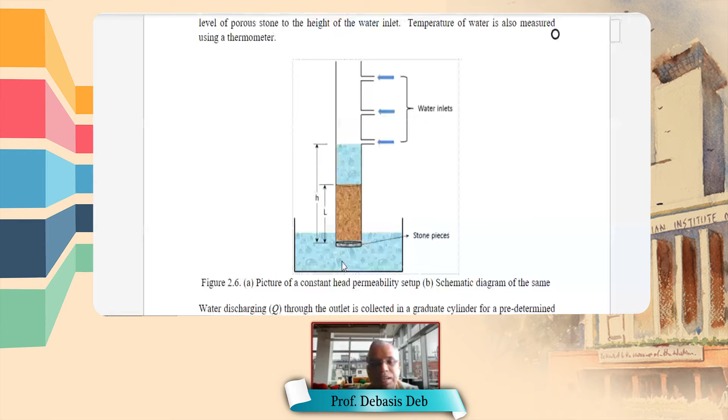So now under this pressure head, we have a length L, which is the sample length. So it's very simple, we can now write the formula, just Darcy's law. Q is the quantity for a given time, which came out, and we have measured it. K is the hydraulic conductivity, and you see it is exactly that formula. H is that water head, that means HA minus HB.

Here HB is considered to be 0 because it's atmosphere. And this is basically LB minus LA, or that is the length L.

So once we know this, why are we doing these 3 different cases? Because we vary the water head H so that the quantity will change. If H is high, Q will be high. Under that condition, we get at least 3 points like this. So we vary the head, the quantity changes. Then we draw a line, and the slope of this line is basically K.

Because you can see this is y equals mx, and this is m, and this is x. So that is what we are plotting here.

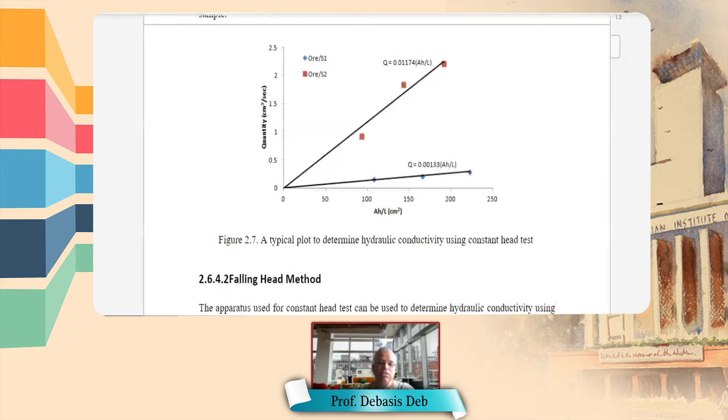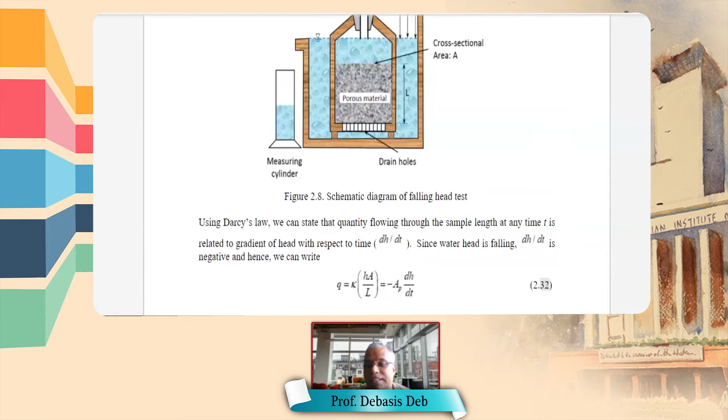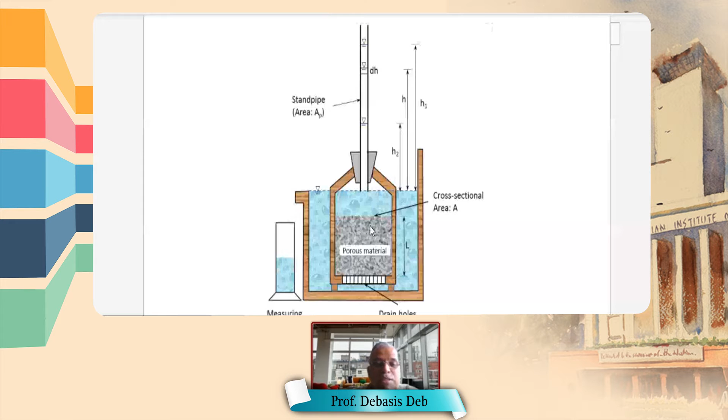Another experiment is called the falling head method. Let me first show you the diagram — this is in the book, you can see. What this is showing is the porous material will be here, in a kind of chamber, and there will be some drain holes so that the water can come out.

Here they say the name is falling head — that means we are allowing the head to change. In the previous experiment, we did not allow the head to change, so the water inlet equals the water outlet. So it's basically completely steady state flow — whatever is coming in, that is coming out.

Here what is happening, let's say there is an initial water head, and we know the cross-sectional area of this — that's called a standpipe, and let's say the cross-sectional area is AP.

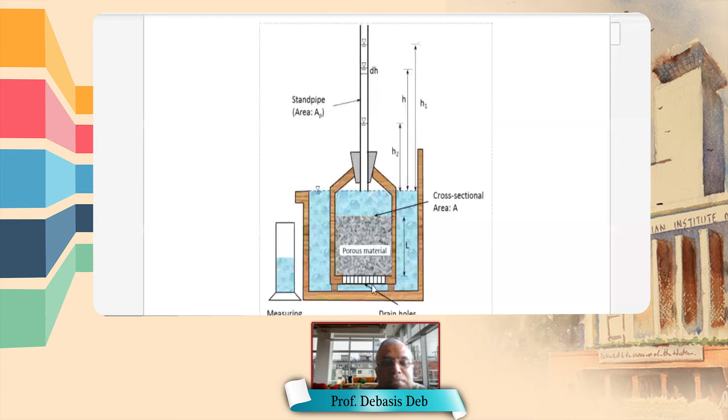Water is coming through that and will directly enter into it, then water will come out through this. So somehow this one is not working.

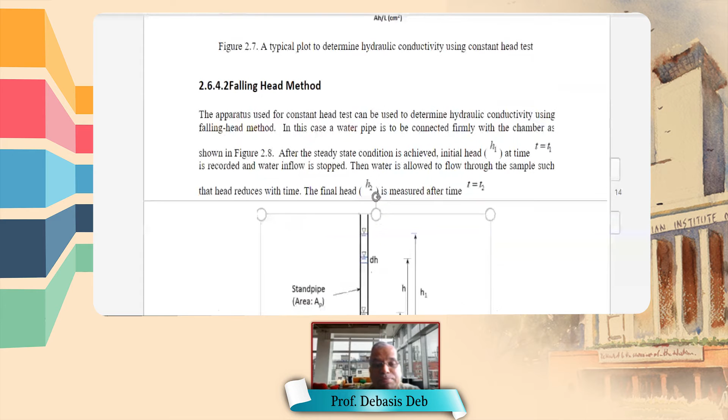Now, since the head is going to change, what is the equivalence here? Let me come down. See, the quantity must be the same, right? Whatever is falling through that standpipe, that smaller pipe, that quantity is what?

The dH by dt. Let's say for a certain time dt, it has fallen by dH. So how much has it fallen? The volume, AP into dH, is its volume, divided by dt is the rate at which it has fallen within that time, and that must equal whatever Darcy's law told us through that

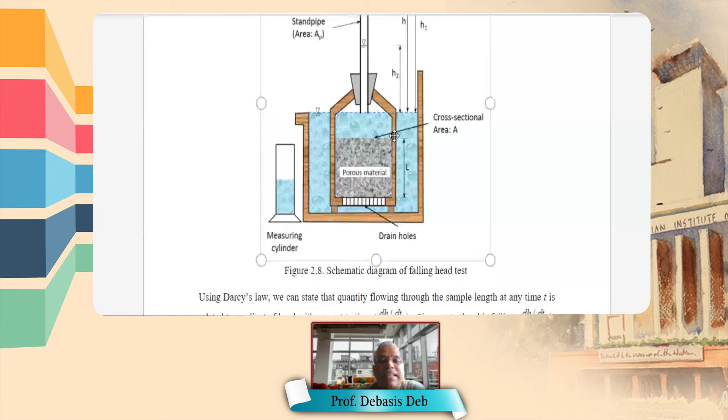cross-sectional area. So this is the A, the cross-sectional area of this sample. Then this is the L, the length of the sample. And so we know K into HA by L. This is from Darcy's law, and this is what is the falling head.

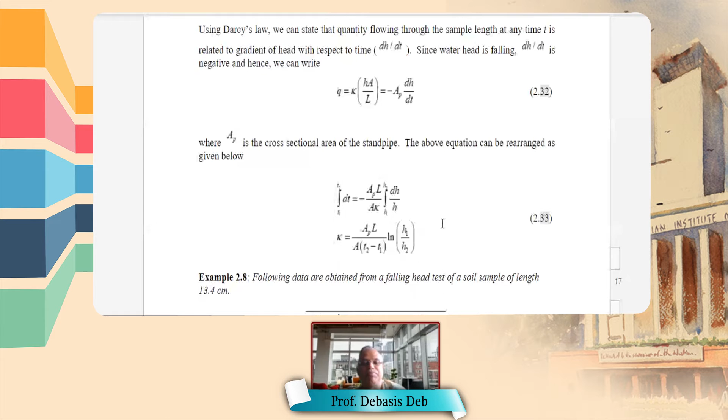So now if we integrate between time T1 to T2, you have to get two times, and you have to measure two heads, say starting head and ending head at time T2. So we get a formula like this. By integrating this, we can calculate the value K.

Now these are the two ways to calculate the hydraulic conductivity. I will encourage you to think of any other way if you can find out, this will be fantastic. Now in our lab we have the experimental setup for both of them. When you come back, you will do the experiment in both setups, and you will find out the value K of that certain soil or sand. This is what you will be asked to do. The formula and all these things I'm not writing, but you can get it from the book also.

So this is what is the two experimental setups for finding out the hydraulic conductivity. All right, now I hope you are now seeing the whiteboard. So what I told you today is two experiments. What happened here? Okay, number one is

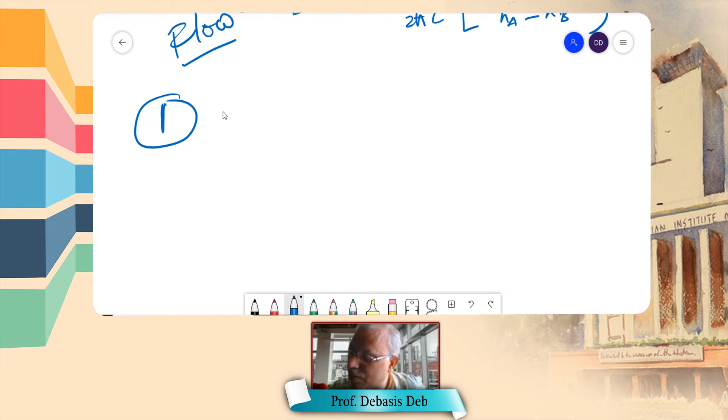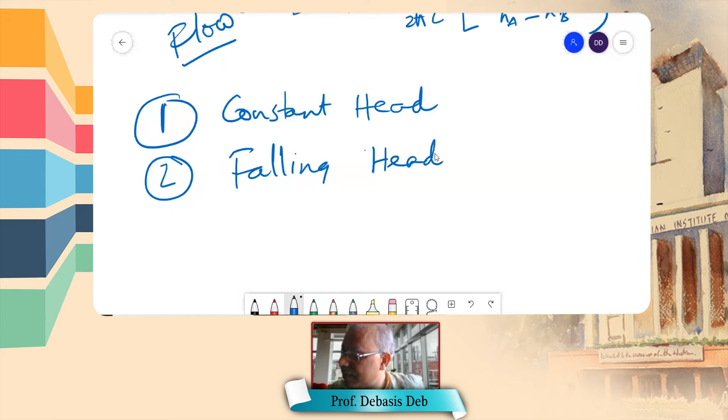constant head, and number two is falling head, for finding out hydraulic conductivity.

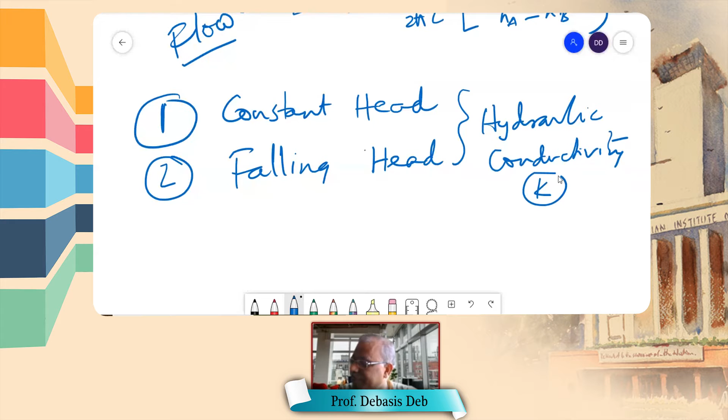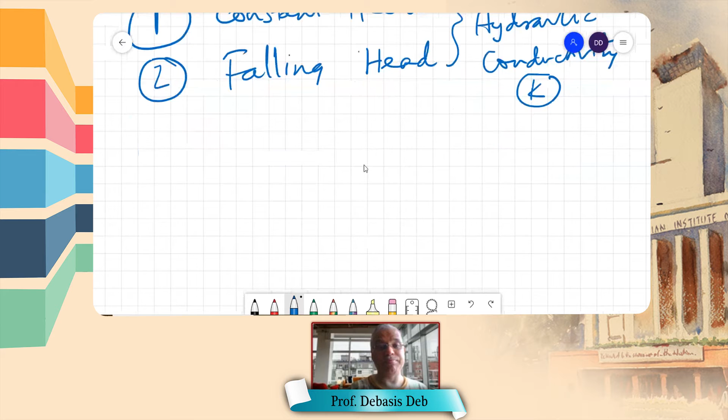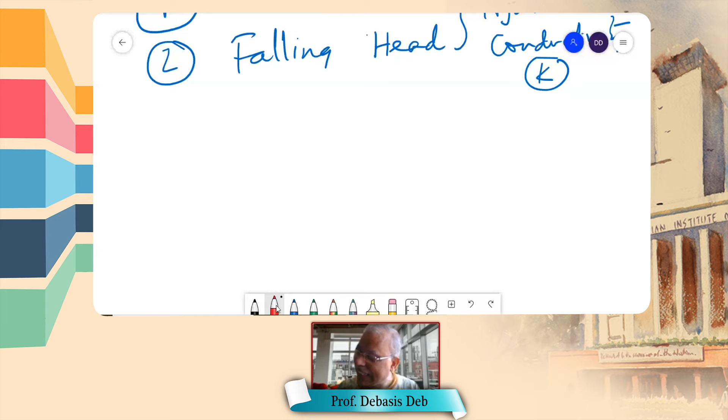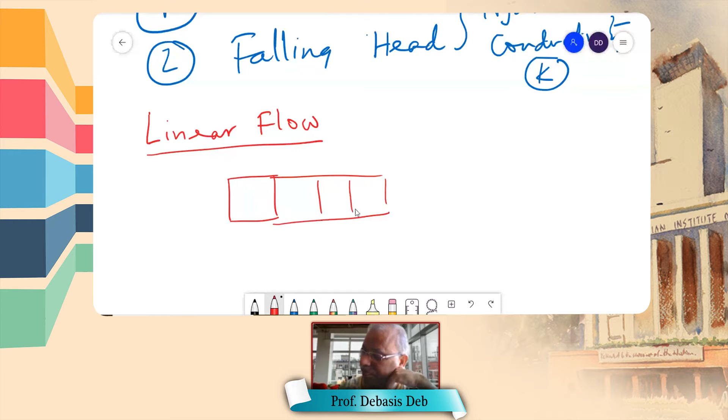Now we will go to a territory where, let me draw it first, then I will ask you to calculate. Let's say this is a linear flow happening, and flow is going from here to here. And let's say this is some HA, and this is some HB.

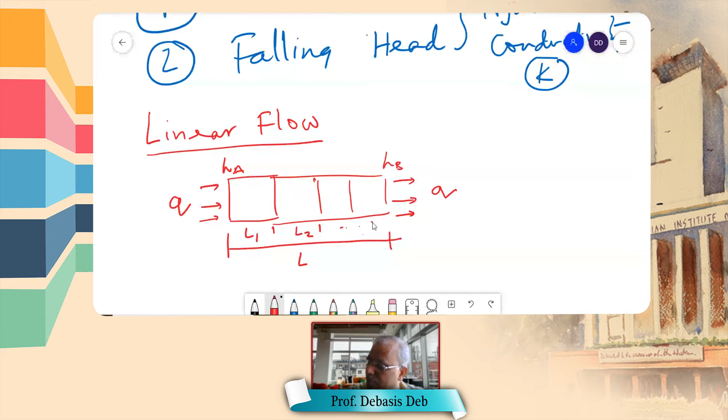This is the pressure head. The flow is Q. The total length is L, but each length is L1, L2, and so on up to Ln. And this has different rock layers, they're all different. So they have K1, K2, and all the Kn.

So these are known, K1, K2, Kn is known. Quantity Q is flowing from point A to point B, where the pressure is HA and HB. Definitely HA is greater than HB.

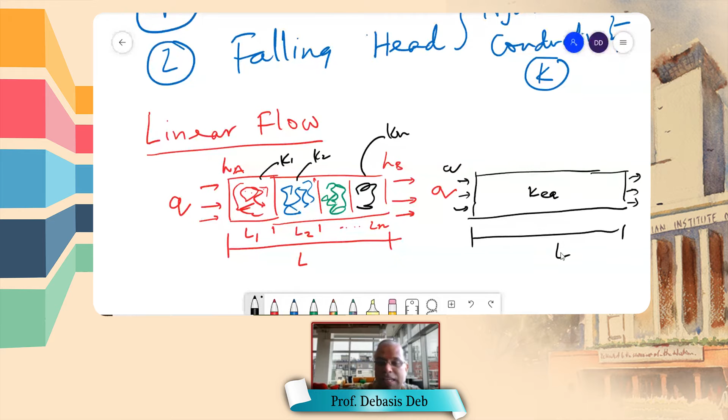Now, if I have to replace this by an equivalent material, let's say K equivalent, the same Q will come in here and the same will come out here. The length is again L. So you have to tell me, I'm giving you 2 minutes to find out, K equivalent equals what?

This is a series combination of strata. Each stratum having length Li and its hydraulic conductivity is Ki. Is that clear? So their length is Li and hydraulic conductivity Ki. They are under the pressure difference of HA minus HB for the total length L. So what will be the equivalent hydraulic conductivity

of this combination of layers? You have done the resistance equivalence when it is in series. Now it is the hydraulic conductivity equivalence. Find out the equation. I'm giving you just 2 minutes, or somebody tell me how to do it, where to start.

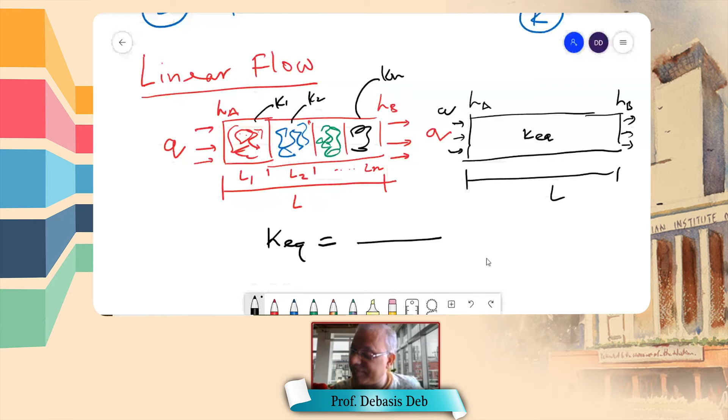So we can start using Darcy's equation for each layer. Okay, you tell me for the first layer, what will be the Darcy's equation for this layer? Q is K1, HA minus HA something, divided by...

Okay, let's write del H1, this is the pressure drop, let's say I assume from here to here. This will be equals to Q by A using Darcy's law. I am writing L1 by K1. Can I write that? Everybody see that? Yes sir, okay, I just rearranged.

So basically the pressure drop for each layer is different. So this I can put i for the ith layer, it will be like this. And A is constant here because the cross-sectional area is constant for each layer.

Now, definitely the sum of all this for all i equals 1 to n layers must be equal to the same pressure drop. If I sum all this pressure drop, this will be HA minus HB, isn't it? The total pressure drop, like you have done with the voltage difference between two points. Here is the potential, the pressure. It's exactly the same thing.

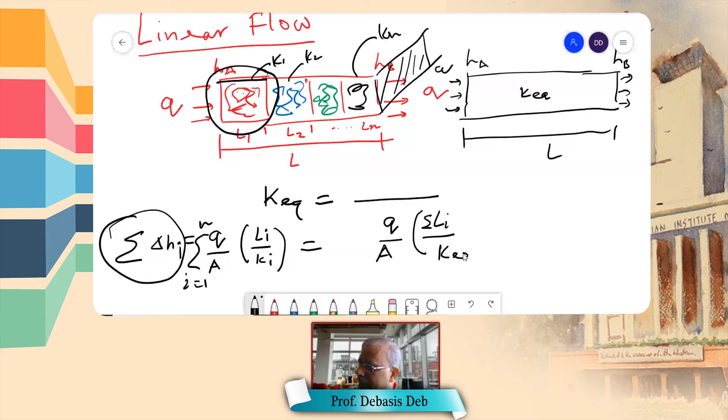And so this one will be, again, I can write Q by A, because this remains constant, equals summation of Li by K equivalent, right? So from there you can find out K equivalent, these cancel out, so I can write summation of Li by summation of Li by Ki. Okay, that is your K equivalent here. Everybody got that?

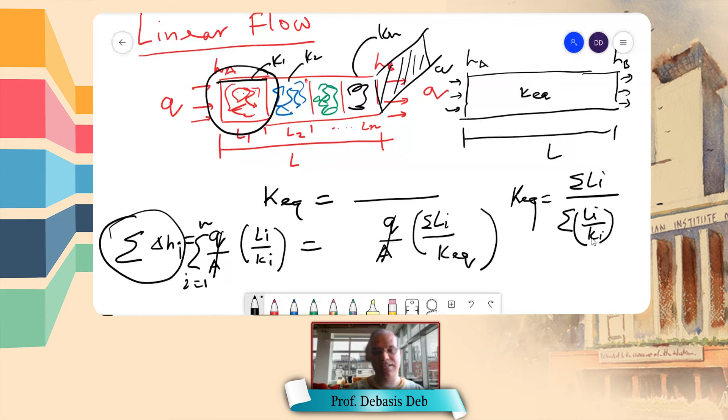Yes sir. Okay, so if the layers are in series, and the same Q is flowing through all the layers, then we can find the equivalent hydraulic conductivity. Now can you find the same for...

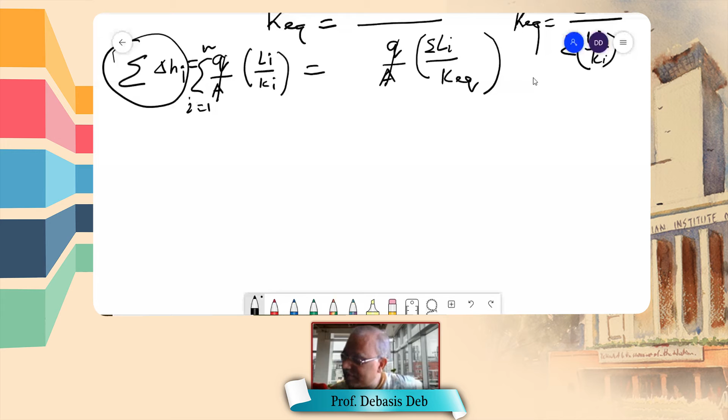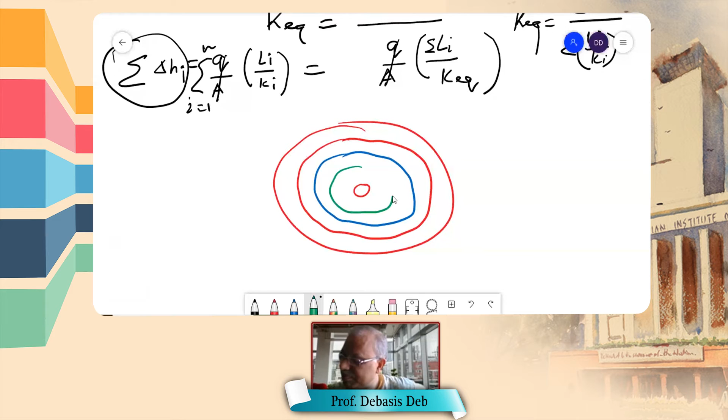radial flow? I can give you the drawing of the radial flow, and let's say this is the well. Now I have different layers, let's say this is R1 and this is Rn, and let's say this is R1. This may be Hn and this may be H1, let's say H1 or H0. I made it 0, then it is better.

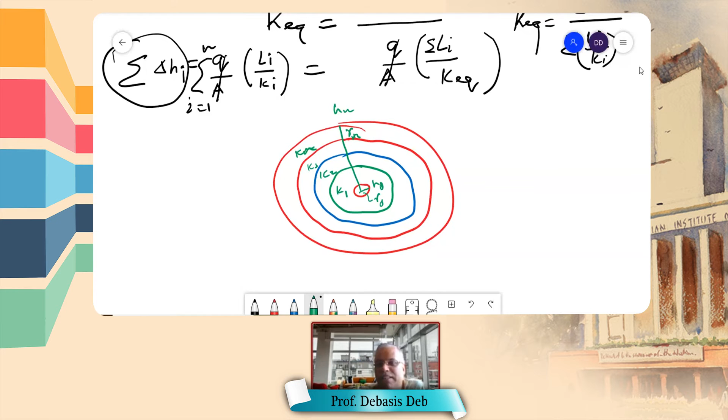Can you find that out? And all these things have different values. So this one is K1, K2, so on, K3, and up to, let's say, Kn. Here the radius is the difference. So can you find that out for radial flow? I hope you remember the equation, otherwise I can show you the equation. I think it is there.

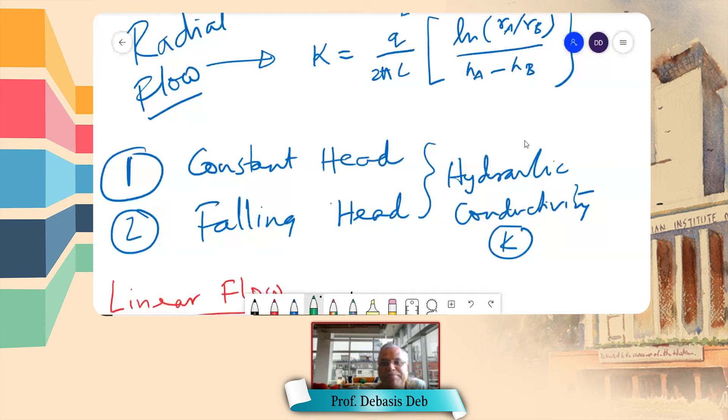This is the equation, okay. You can use this equation to build the equivalence. You write this equation, K equals Q by 2 pi L. Here L remains constant, okay, and ln Ra, which is the extreme side, by Rb, and Ha minus Hb. The approach is same, okay. The approach is exactly the same. There is no difference between the approach. Only thing, you have to use that equation.

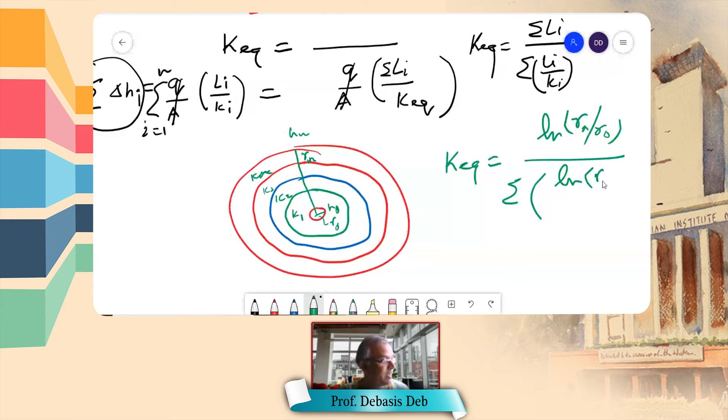And let me give you the formula so that you can try it at home. So K equivalent equals ln Rn by R naught, divided by summation of ln Ri by Ri minus 1, divided by Ki. Okay, this is what will be the formula if you derive it. Okay, exactly the same way you can derive it. Rn is the last radius, or the largest radius, where you have the maximum pressure, the maximum head.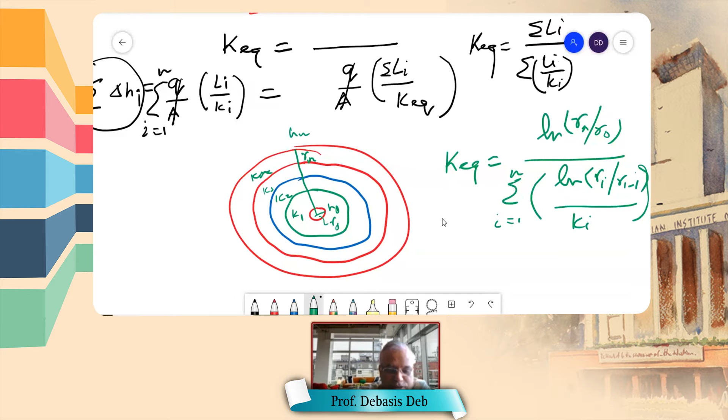Okay, you want to try it or I go further? If you like to try, you can try it also. Naito, you try this, I give you another one. You try this thing now at home and derive it without looking at the book, okay, by yourself.

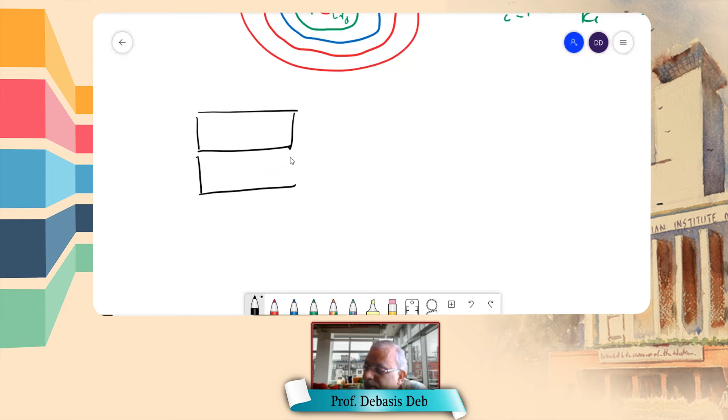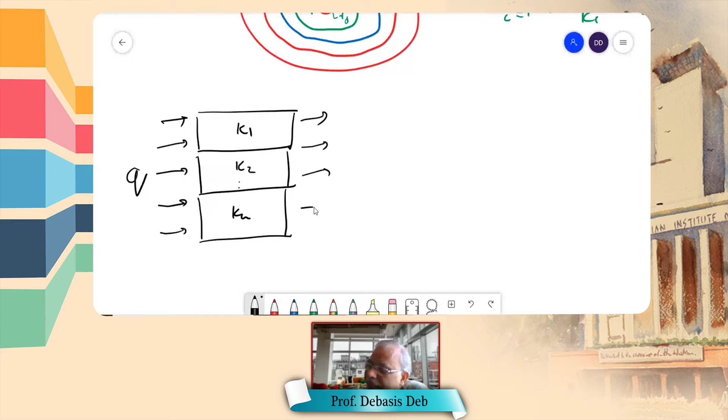Now let's assume, again, I'm in linear flow and this time the strata are parallel. Now how is the parallel? The stratas are like this. So let's say this is K1, K2, and this is Kn. Q is flowing like this, and this Q is coming like this. L is constant for them. And this is HA and HB.

So can anybody tell me what is this K equivalent? You calculate that. This is a parallel combination, you can see that, okay. So this is layer number 1, and this is layer number 2, and this may be layer number 3 or layer number n.

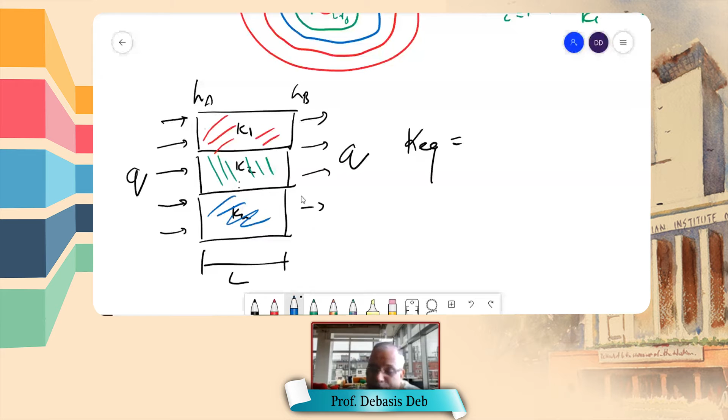Now what is the difference? Here the difference is in this. Okay, so this may be, let's say, I give in the book what I gave. Just a minute, the symbol, so that you do not get confused. I gave T, so let's say these are T. So this is T1, matlab thickness, this is T2 and this is Tn.

Somebody tell me what will be the K equivalent. The area will be same. No, your area is getting changed, na? That is depending on T. This is the catch here.

Your potential difference remains constant. You know, in series, your potential, the head potential, was different in different layers. Now here potential is same, just like electricity. In parallel, potential remains the same. But here the difference is in that area, and that is controlled by T.

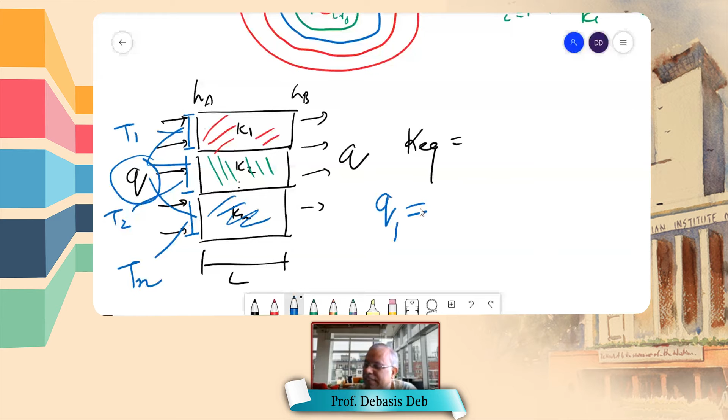K T1. Let's say this width is somehow W, if you want to take. Yeah, somebody is telling me something. His voice didn't come through though. So it's basically K1, this is that area A del H by L. Right? This is the Q1.

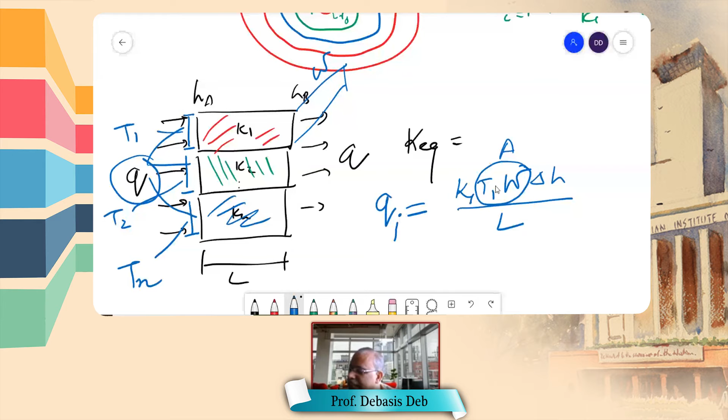So you put now, Qi for each layer, it will be same. Now if you sum this all, this is Q. And in equivalence, this one will be same. So that time it will be your K equivalent into summation of Ti into W. And this will give me the total area. Del H remains the same by L. So here this cancels.

So now W also cancels because W is the width. So the equivalent, what do you get? K equivalent, if I have to just rearrange this equation, so this will be, where did I go? Here, summation of Ki Ti by summation of Ti. Okay, it's basically just a thickness weighted average. That will be the equivalence.

So here the Q gets distributed just like current. Over there current gets distributed, here the quantity gets distributed. And here we are following Darcy's law, there you followed Ohm's law. That is the only difference here.

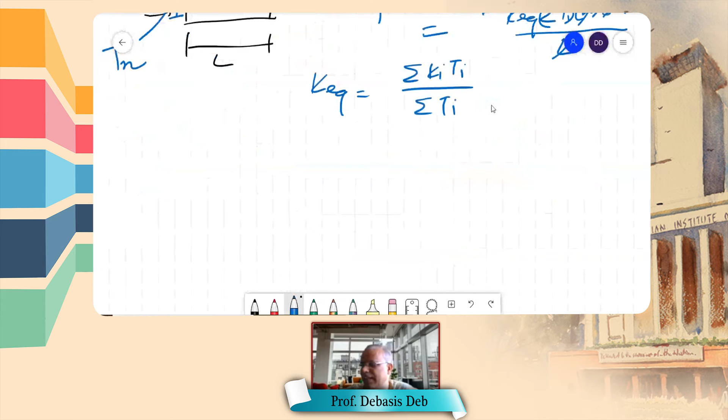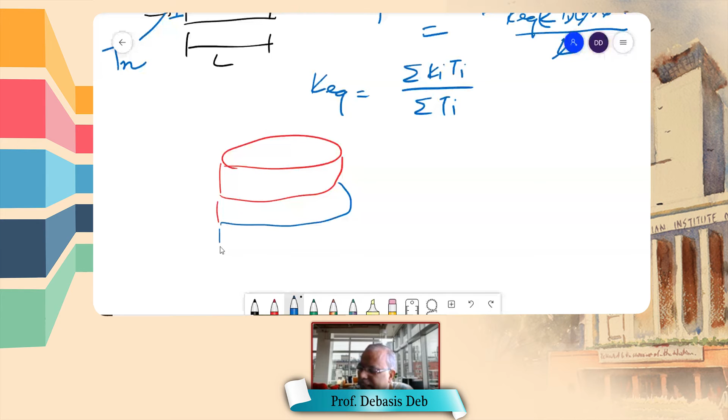Now, interestingly, if you do the same thing for radial, let me just draw it for you, and I will again ask you to do it at your home, the radial thing. So the layer will be something like this. Then another layer, then another layer. The layer is like that, and my hole is here. So this is the H, let's say some A, and this is HB here.

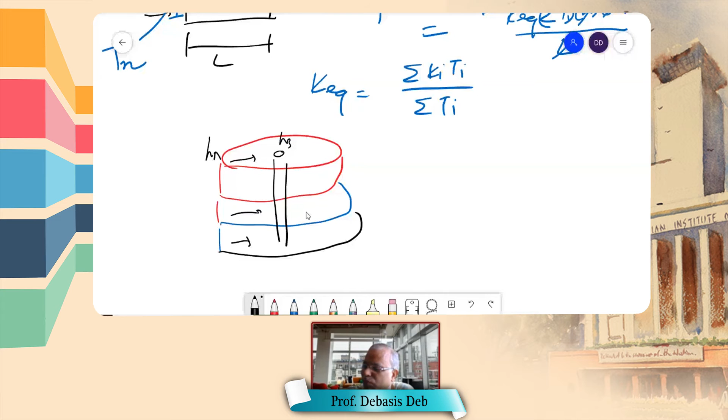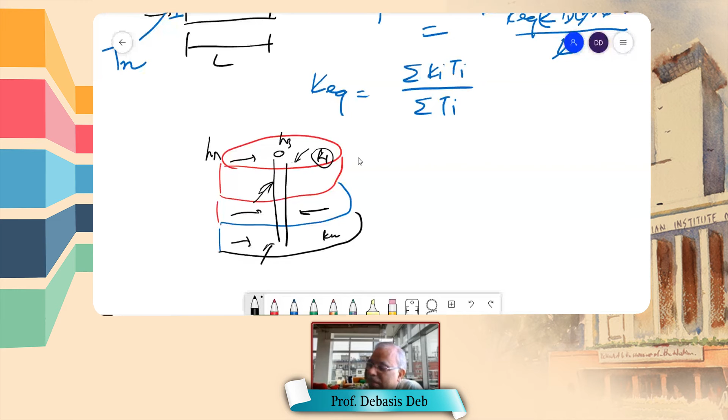So flow is coming like this, but at different layers there will be different flow, because this one will have K1 and this will have Kn. So depending on this hydraulic conductivity, the flow will be different. Similarly, here what is happening?

This, if you say T1, they are getting changed, and this is Tn. So this is what is changed here. And so as the Q, the total Q is not going to change, it is going to distribute into the different layers based on its hydraulic conductivity.

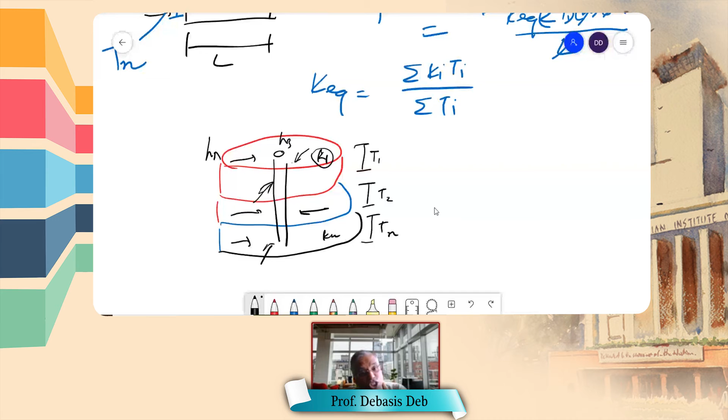But remember that in parallel, the potential difference, here the potential meaning the head potential difference, remains constant for each layer. Just like Ohm's law, because you know Ohm's law, just follow that. And here also the formula is exactly the same as the above. You can derive it. So I hope you understood the concept of combining the layers.

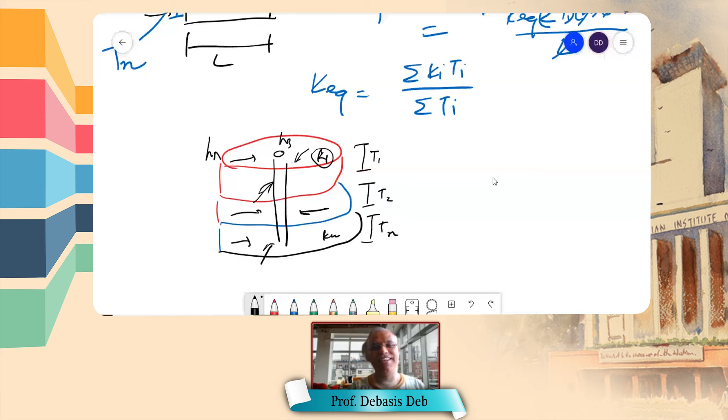Now, sometimes there may be layers, rock layers are not so nicely distributed, because you see the difference between the mining field or a geo field with any other engineering side is these are all mother nature, and the way they have formed, we have to take it. See, in electrical engineering, if some resistance is not working, you can change it. But here, if certain layer is not giving you any Q, you cannot change that.

You have to just live with it. So we have to find out how to make the, let's say, petroleum or gas or water flow through that layer. So we do fracturing and all these things to increase it. And also the layer will not be deposited so nicely the way I have drawn. They may be at an angle, and that may be in a 3D angle.

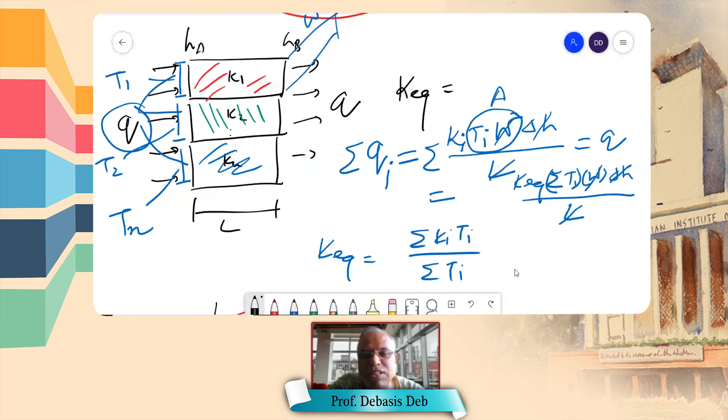There are a lot of complications in actual field situations that need to be handled, either with this kind of equation we derive for that particular case, or there are some other sophisticated methods you will learn later on.

So my point is, these are the 4 cases I have told you. These are the basic cases: linear series, linear parallel, radial series, radial parallel. So these are the 4 basic cases. Based on that, we have to build different models or different cases. Now we will do some problems.

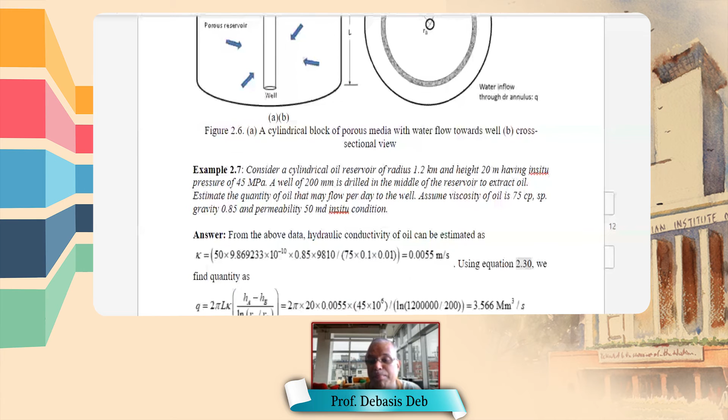I start from the beginning of what I told from the last classes. This is exercise number 2.7. Let me make it a little bigger, maybe for you to see. You can see that 2.7.

Consider a cylindrical oil reservoir of radius 1.2 kilometer and height 20 meter, having in situ pressure of 45 MPa.

By the way, do you understand what is in situ? In situ stress, is it? Yes sir, Professor Verma has told you, natural stresses. What is it? In situ, like I have written, in situ pressure - the natural stresses underground. So this is basically pre-existing. Natural meaning here, pre-existing, before a human being or any other natural way has disturbed it. Before that, like mining disturbed the stresses, or stresses already existing in the in situ. In situ means the actual dictionary meaning is in place, whatever is in place.

So here the problem says the in situ pressure of 45 MPa. This is a petroleum problem.

A well of 200 millimeter is drilled in the middle of the reservoir to extract the oil. Estimate the quantity of oil that may flow per day to that well.

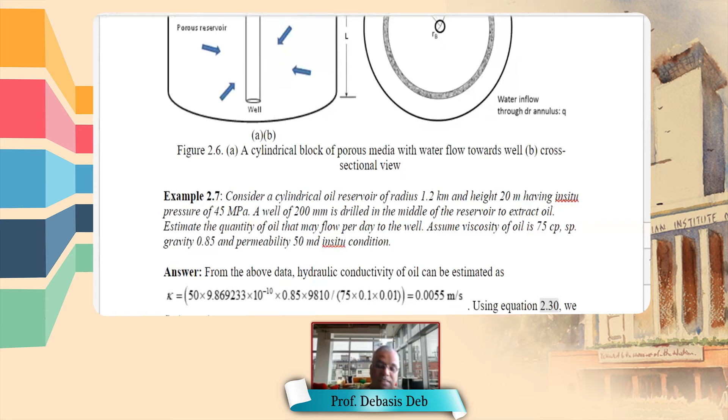Assume the viscosity of the oil is 75 cp. Cp is centipoise, okay, that may come a little later. And specific gravity of 0.85, permeability 50 millidarcy in situ condition.

The assumed things will come later. First, you calculate the conductivity. What is the oil conductivity here? Then we will change it to permeability and all this stuff.

So what is given here? The cylindrical oil reservoir of radius 1.2 kilometer, and the height is 20 meter. So your L is given as 20 meter and RA is given as 1.2 kilometer. You got that?

And in situ pressure of 45, that means pressure difference is 45, already given. So how do you find out the conductivity?

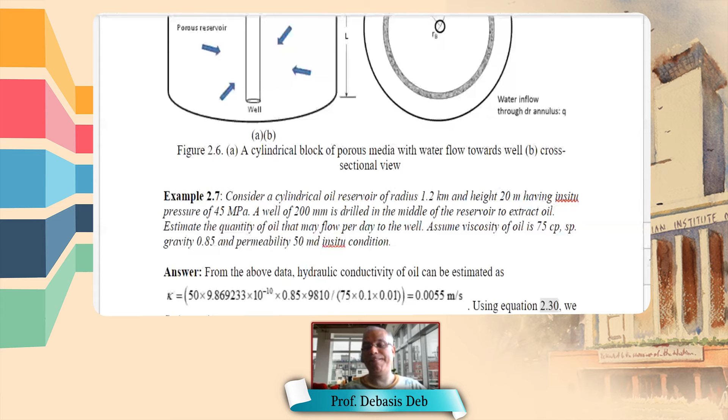So the Q is, using that formula: 2 pi L K into (HA minus HB) over ln(RA by RB). Other than K, we already know everything. This is given 20 meter, this is 45 for HA minus HB. Now I am multiplying with 10 power 6 because I am converting into Pascal from megapascal. And this is converted into millimeter - this is 1.2 kilometer and this is just 200 millimeter.

So converted into this. Now what remains is the value of K because we need hydraulic conductivity - sorry, here is the oil conductivity. Now oil conductivity will come from, because the permeability is given as 50 millidarcy.

So since permeability is given to us, I gave you last time an equation: small k equals capital K times gamma by mu - and mu is given as 75 cp. So these are all conversion factors, by using this it has to come into meter per second. See, this is given in millidarcy. Now 50 millidarcy converted into SI unit - if you see the book, this is the conversion factor.

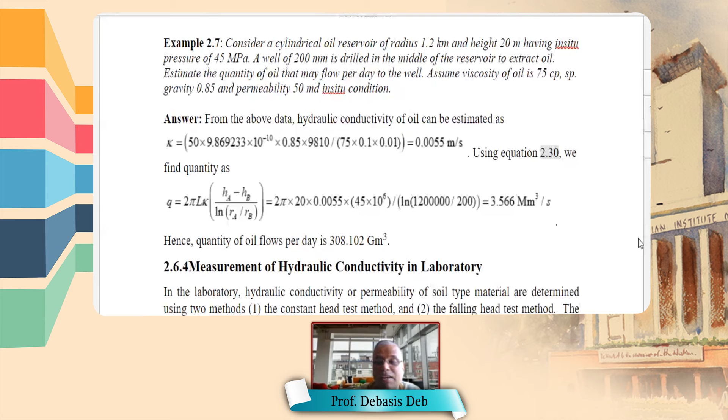This is a very elementary thing, but petroleum engineers do this day in and day out, because this formula, Darcy's law, is their bread and butter. You can tell, you can know this.

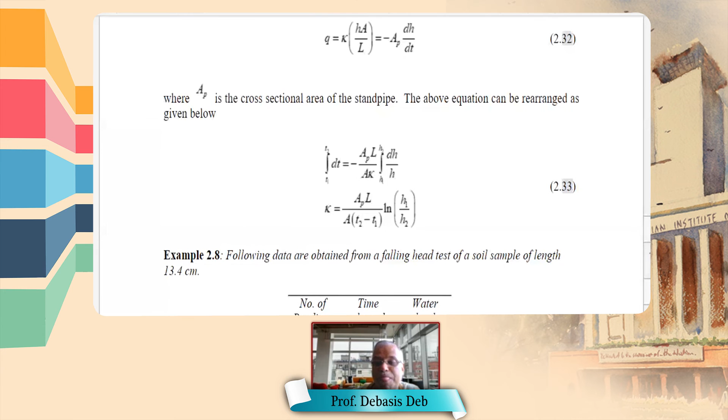Now regarding the constant head, let me see whether we have any problem given. Here falling head is given. Now you just see the way the problem comes. This is very important, how the problem is being given to you.

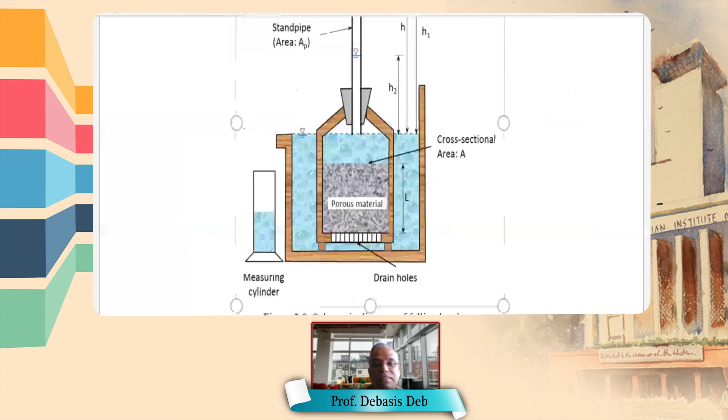Let's say the following data are obtained from a falling head test of a soil. We have done testing of hydraulic conductivity of a soil sample of length 13.4 centimeter. So remember this length L is 13.4 centimeter.

Now how many readings have we taken? We have taken 4 readings, and you see the minutes elapsed. I think this is from a real test, that's why it is real data.

At the 0 minute, meaning when we started the experiment, the water level was 135 centimeter from some datum. I think that datum was at the bottom, so that was 135 centimeter.

Let me show you where is that datum so that you understand. See, this is the datum. There was the initial water level. From there we are measuring.

So that is 135. Then after 409 minutes, how many hours? About 6.5 hours or so, the water level drops to 115 centimeter.

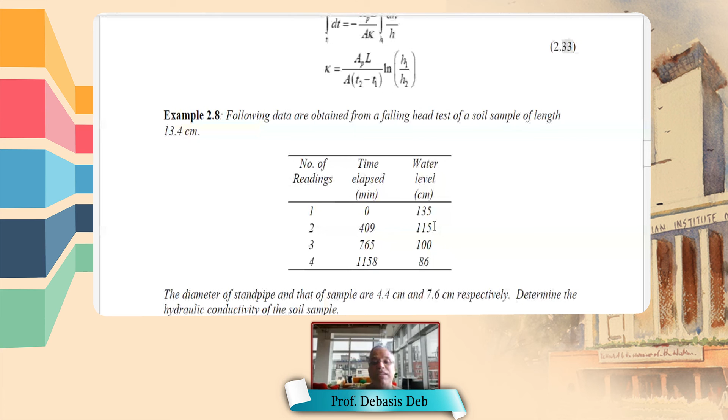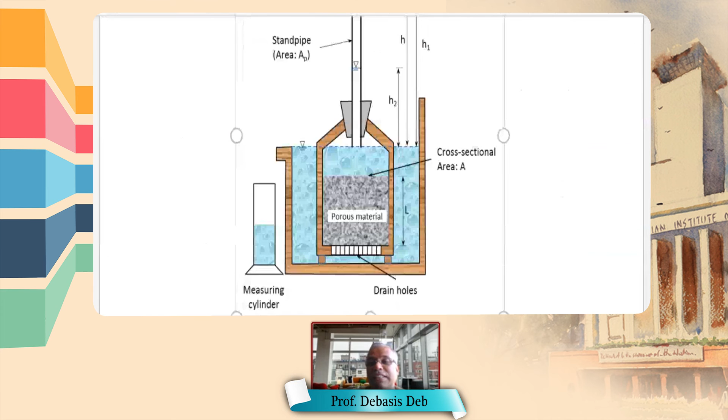You understand the experiment, because in your BTP or something, maybe you have to also do this experiment, for some soil you have collected from some mine, and you need to do this. So how will we do it?

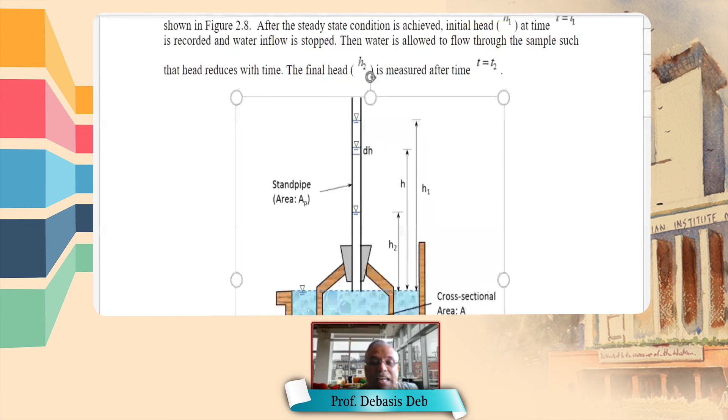So initial was H1, which is 135. Then after 6.5 hours, you came back and saw this water level has dropped down to a certain level, which is 115. Like this, you have to collect the data.

Now they are asking to calculate the hydraulic conductivity of that soil. How much is the hydraulic conductivity?

If you write ln(h1/h2) equals to, you multiply by this, so T2 minus T1 is my variable here. So ln(h1/h2) is my y, and k into this, and rest everything is constant. That is what we are calculating here.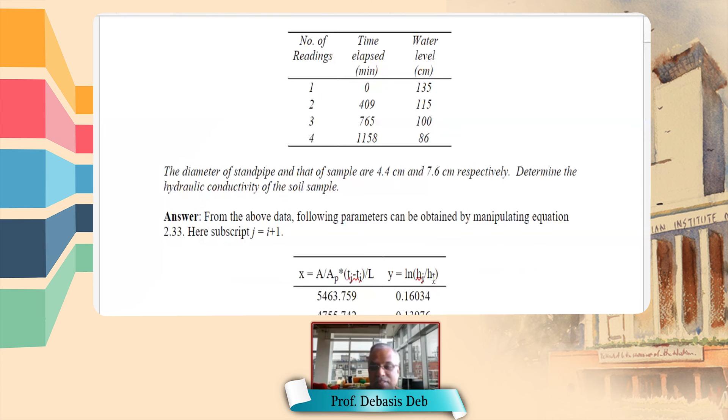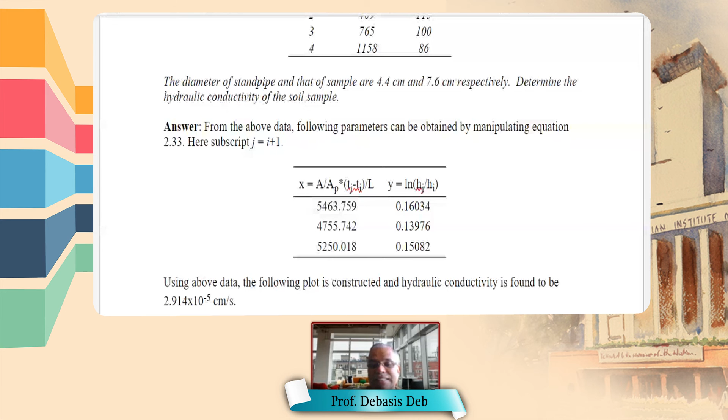ln(hj/hi), that means h1 by h2, we are doing it. That has been calculated, and this value has been calculated. So now if you plot y versus x, that is what we have plotted. So we got 3 points.

And the slope of this best fit line is my k. That is found to be 2.91 into 10 to the power minus 5 centimeter per second. So you see how slow it is, 10 to the power minus 5 centimeter per second. It was hardly moving, this water.

I think this is kind of a very fine grained soil, that's why the value is low. We even get even lower than this value. If you do the testing in rock, this will be even lower than that value, in the order of 10 to the power minus 6 also we get, which is very low.

Now the reason I am saying this, you are going to become engineers, so you must have an idea of the numbers. If somebody asks you what is the general permeability or hydraulic conductivity value of soil, you should not scratch your head. You should immediately tell, sir, in the order of 10 to the power minus 5 to minus 6 centimeter per second, it is in that low. But if it is a loose soil, maybe it will be at a much faster rate.

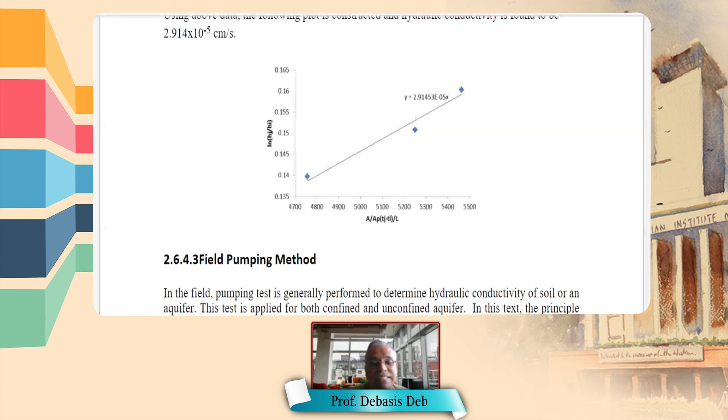So next time, if the water is not coming into your house from the groundwater, let's say in a tube well or something, you will probably know the reason for this. It is the hydraulic conductivity which is causing the problem, because the pressure difference we cannot change. It is not a pipe that I can incline a little bit to make the pressure difference more.

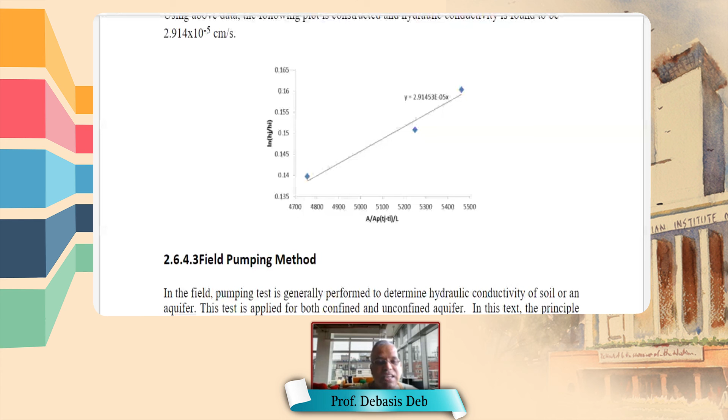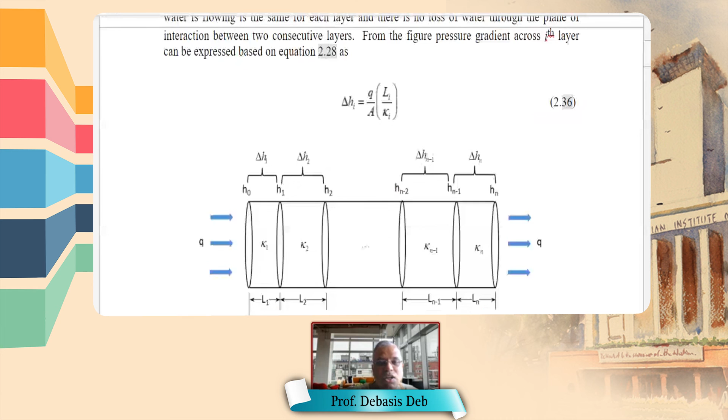This part I have omitted from the book. This is a testing in the real life, in the real field. Let's see whether I have some here. So this is a very standard equivalent hydraulic conductivity problem: find the equivalent hydraulic conductivity of 4 beds in a series having equal formation length for a radial system.

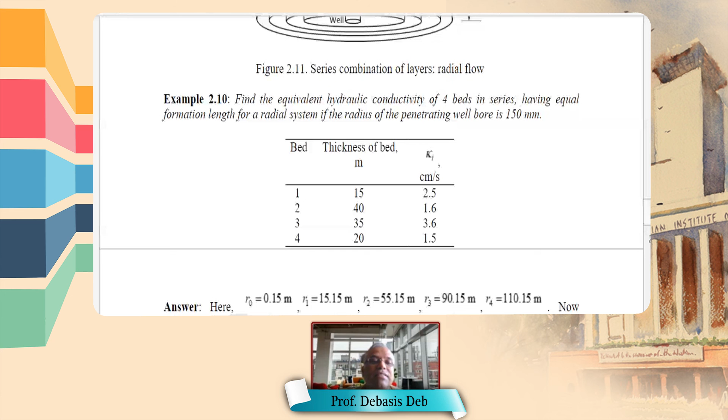I think you can try this at home. I will go to the exercise if we have it here. Let me see, I have the exercise problem also. Can you do number 5? Let me see, I have much more, number 5.

Okay, write it down. This number 5 problem, one data is missing though. A sandstone specimen having weight 320 grams has a diameter of 54 mm and a height of 60 mm, and the moisture content is 20%, having grain specific gravity 2.65. Find the porosity of the sandstone sample. Let me write you the data.

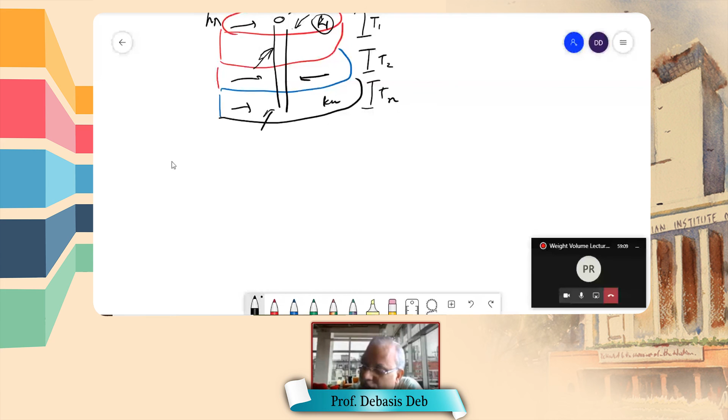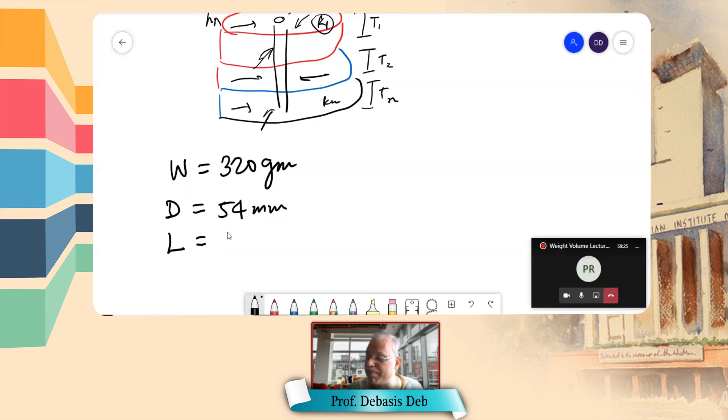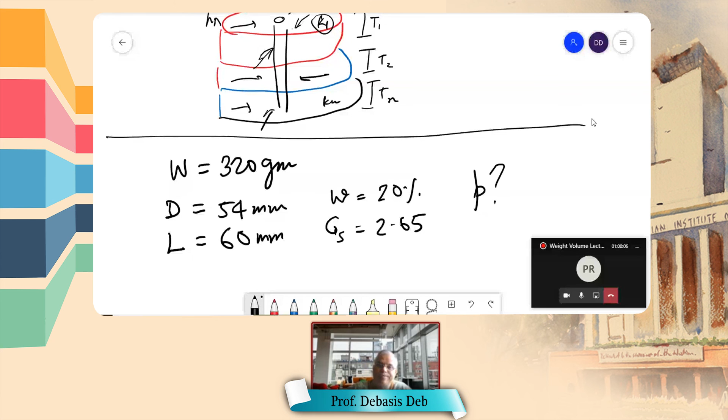The moist soil has W equal to 320 grams, diameter is given as 54 mm, length is given as 60 mm, small w, the water content is 20%, and GS is 2.65. Find P. This is the problem. What will be the porosity?

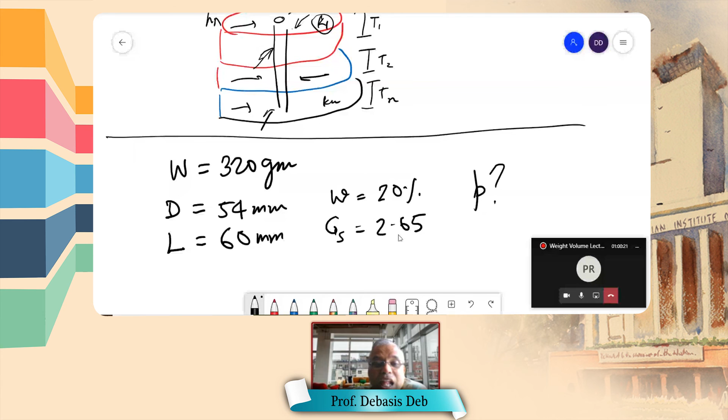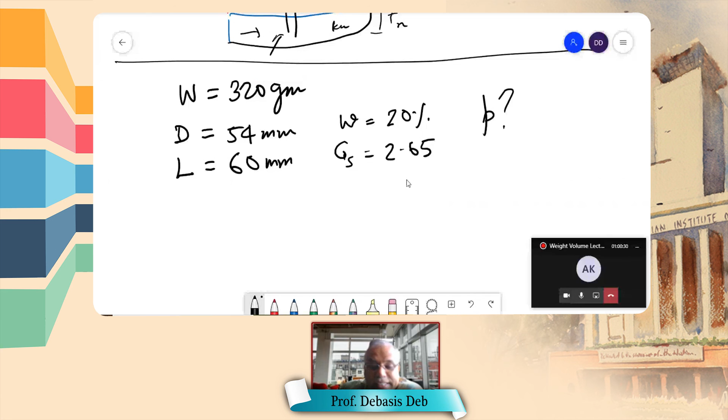Who can do that? Are you seeing this, what I have written? 0.27? 0.27. Somebody, anybody else got it?

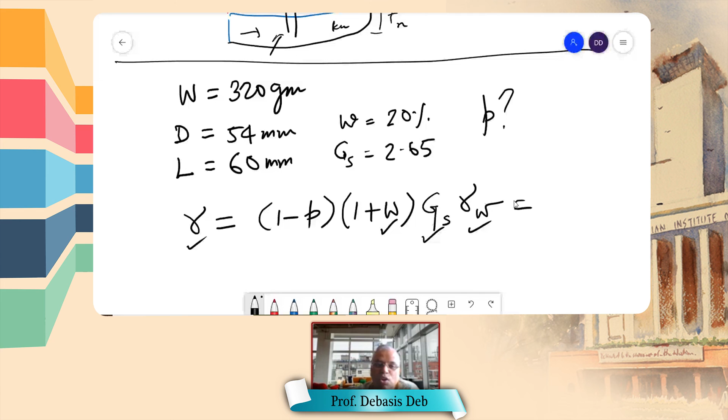So it is that equation you will use: 1 minus... okay, very good. So GS into gamma W, this is that formula. Everything is given: this is given, this is given, this is given. This you have to find out. Now only this is not directly given, so you have to calculate capital W divided by pi d squared by 4 into L, that is the volume. So just keep the units okay, then it will be 0.27, meaning 27% is the porosity for this.

This is one of the ways to find out the porosity. Remember that, this is not just a problem you have solved. I will give you a sample when you come to the lab. You have to measure the diameter, measure the length, measure the W, whether the moisture is 20% or whatever, you will measure it. The GS only will be given to you, and this weight also you have to measure. I will ask you to find out the porosity. So this is by experiment, you have to find that out. This is the formula you must know to find out.

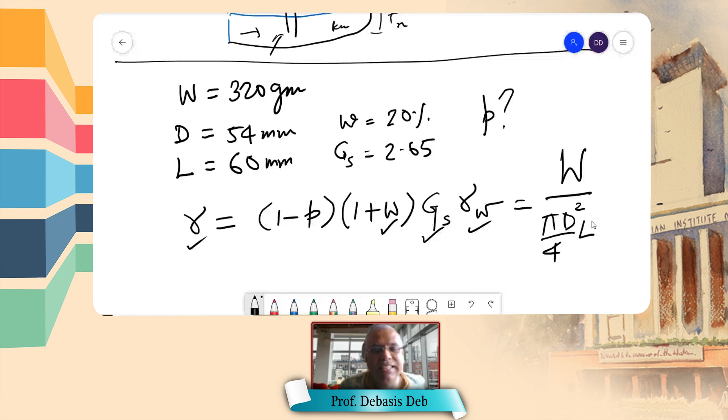So this ends basically, there are a lot of exercise problems. I think the TA will also take care of it next time.